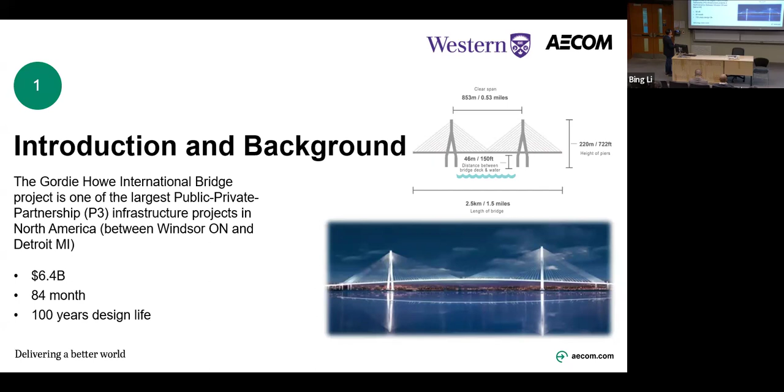Okay, so everybody probably knows where Windsor is. It's almost in the west and south of Ontario, or even of Canada. Detroit is just over the Detroit River. There are two existing routes to the United States: one is the Ambassador Bridge, which is about 100 years old, and the other is a tunnel, the Detroit tunnel, going downtown to downtown. But the government of Canada wished to have a connection through the 401 directly to another bridge, which is the Gordie Howe bridge.

So this one is the site of this project. Today we're going to cover mostly the Canadian POE entry, about all the building design. This project includes main bridges and the Canadian Port of Entry, the US POE, and then Michigan interchanges connecting with the I-75.

The Canadian Port of Entry includes 9 buildings, and then we have return bridges to Canada. So if there's something wrong on your way to the United States and you have to go back, there's a return bridge for that.

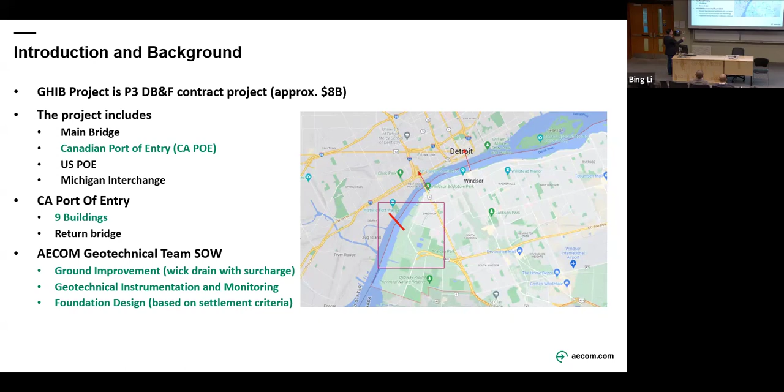So this is the Canadian Port of Entry, with the 9 buildings I mentioned, including the main building and the primary inspection booths. When you're coming into Canada you have to show your passport there. This is the area, and then the important one is the toll booth.

You have to pay the toll to use the bridges, and we also have a large scale imaging building which has some X-ray capability, so big trucks can go through to check what's inside. There's also a maintenance building.

There's also a salt barn - if there's a lot of snow, you use salt to clean the road. We also have a hazmat canopy, and then a maintenance and client processing building. So 9 buildings total are in the scope of the Canadian POE.

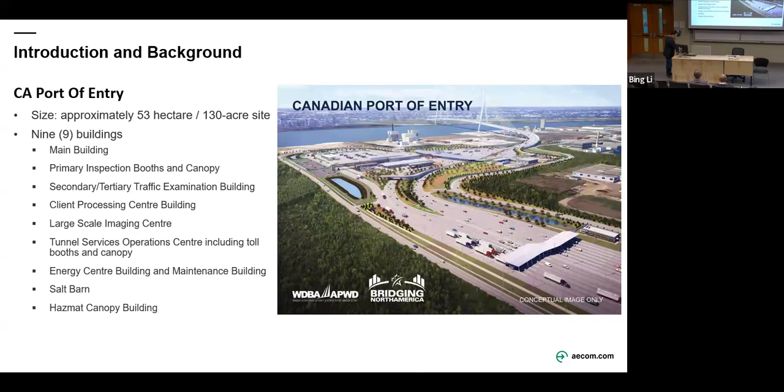Okay, so regional geology - if you're a geotechnical engineer focused more on soil mechanics, you may be familiar with the geologies. The site's regional geology lies on the physiographic region of southwestern Ontario and the eastern Detroit lowland physiographic region.

It's called the St. Clair clay plain, which means if you look at the site, the project site is located in the clay deposit.

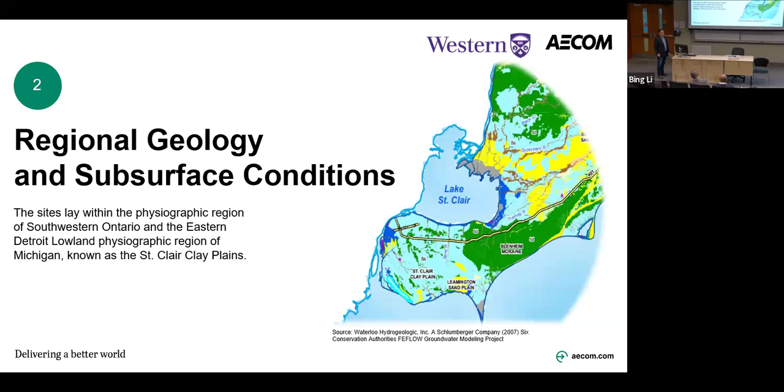A little bit more detail - the overburden is glacial lacustrine and glacial till and till-like soil in the Windsor and Detroit metropolitan area. Near the river there's a lot of soil deposit, and at the bottom of the deposit is till material, which combines every type of material together. Just beneath the till there's limestone bedrock.

So we have to look at the geologies, not only the overburden, but also the bedrock geologies, for the design of any foundation or design work.

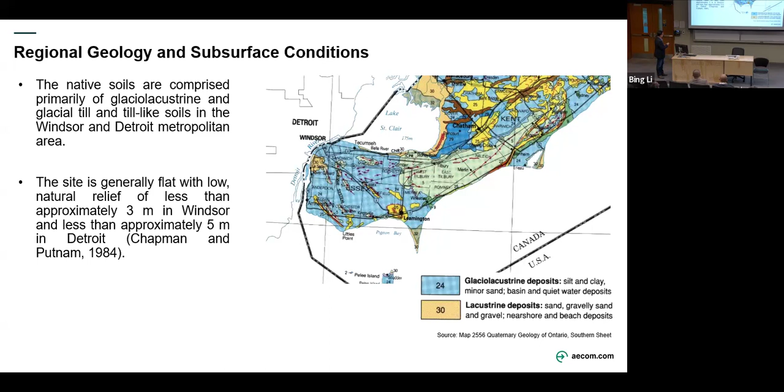So based on some investigation, we came up with the soil stratigraphy using all the data we analyzed. As you can see, we have about 2 meters of fill, which is just fill works - usually if you have a P3 project, the owner prepares the site, so that's why they put some fill on the ground. There's old fill and new fill.

Also below that, there's desiccated clay - the clay is a little bit dried and over-consolidated, so we call it desiccated clay, which has a little bit higher strength. Then there's an upper clay layer and lower clay layer, depending on index testing and shear strength and such things, we divide it into 2 layers.

And then on the bottom there's a silt layer - this is almost like a till-like material, which is more granular material at the bottom of the upper layer. Then we have bedrock, but the bedrock actually keeps going - we just did modeling for only a few meters of it.

One of the challenges on this site is artesian water. If you drill a hole close to the bedrock, the water actually comes up. The measured artesian head I found on the site is about 6 meters, so if you just drill the hole, you can find springs coming up to that height. This groundwater also contains a lot of hydrogen sulfide gas, so when it's exposed to the air it becomes a gas and you can smell the rotten eggs - a very strong rotten egg smell.

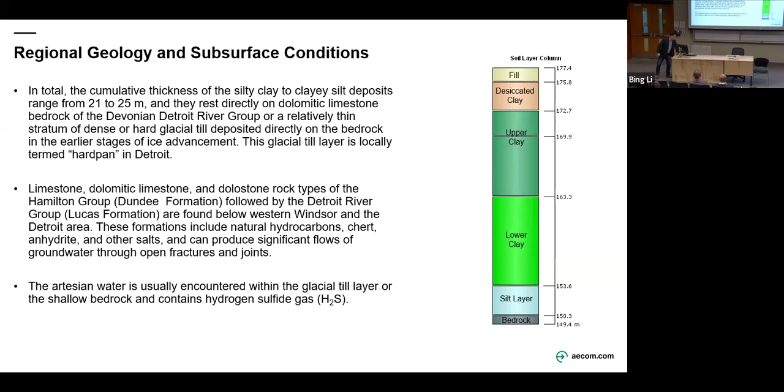So it's a challenge to design with a deep foundation. If you drill through the overburden close to this area, you have to deal with all the artesian pressure and also these toxic gases. That's why our design approach is to do consolidation, using consolidation theory for pre-loading and surcharge design, so we can come up with a shallow foundation for the buildings.

Now for the soil properties: this is a CPT result from one of the sites, the main building site. You can see there's a silty deposit up to 25 meters. Overburden thickness averages about 25 meters - some areas 20, some areas 30. The blow count in this soft clay area is weight of hammer, 2-3 blows per 0.3 meters - very soft clay. So we have to consider primary consolidation and also secondary consolidation when designing for the building.

In addition to the artesian pressure, we also have to deal with a high groundwater table. Actually there are two different groundwater levels. If you go to the site, different layers have different groundwater regimes - sometimes groundwater is in the lower part of the overburden, sometimes there's shallow water as well. Sometimes these are separated, sometimes connecting, so you have to understand the hydrogeology to deal with all this groundwater. We found there are two regimes: one close to the bedrock, which is a very strong artesian water regime, and also very high groundwater about 2 meters below ground surface.

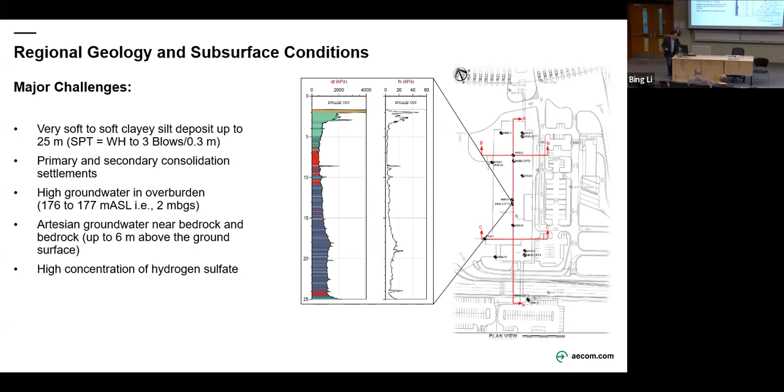As I mentioned, artesian groundwater near the bedrock is another challenge, along with those hydrogen sulfide gases. So we have to consider all these things, and we came up with a design using surcharge, pre-loading, and wick drains.

I think you're familiar with consolidation theory. If you build some surcharge, you can see consolidation accelerating, and then it becomes steady after finishing all primary consolidation. That's the benefit of surcharge and preloading - accelerating soil consolidation to meet design criteria. If not, and you just put a building over there, it will gradually settle over a long period of time, so you need to consider more about that settlement in your design, and it becomes a long-term issue.

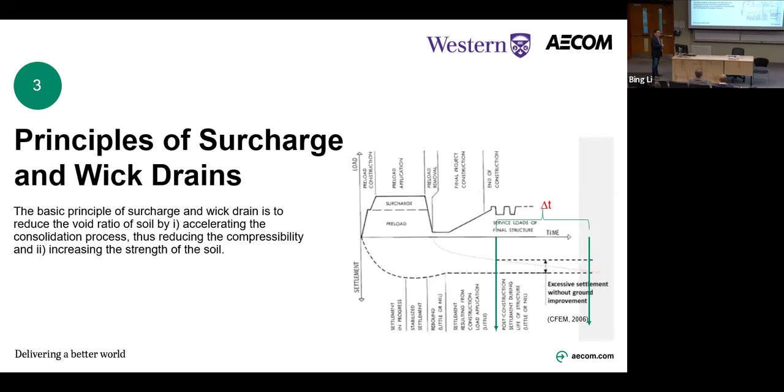Now for some theory, I'll go through this quickly. In surcharge theory, the stress changes from delta sigma z0, which is the existing pressure, plus the surcharge. When you put in the additional surcharge, the void ratio changes from E0 to E1 because the soil is compressed. After consolidation finishes, you can remove the surcharge, returning to the original normal loading condition, but E1 doesn't change back to E0 - so we still retain much of the beneficial consolidation. Another benefit is that the shear strength of the soil increases after the surcharge. Based on this, you have to think about all these things for your future design.

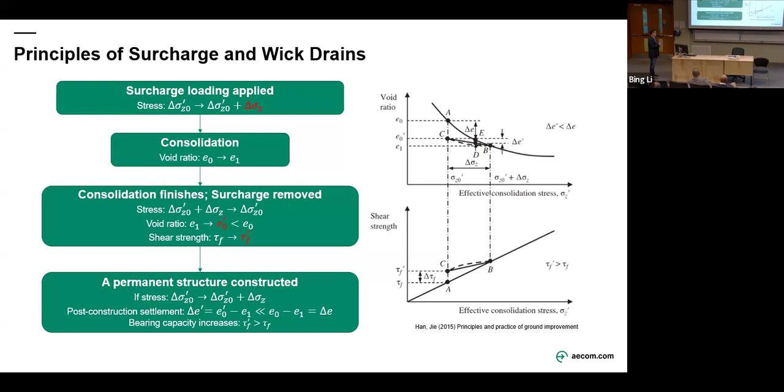Okay, this is the 1D consolidation theory. I'm just going to be touching on it very simply. So what's the benefit of increasing the drainage path?

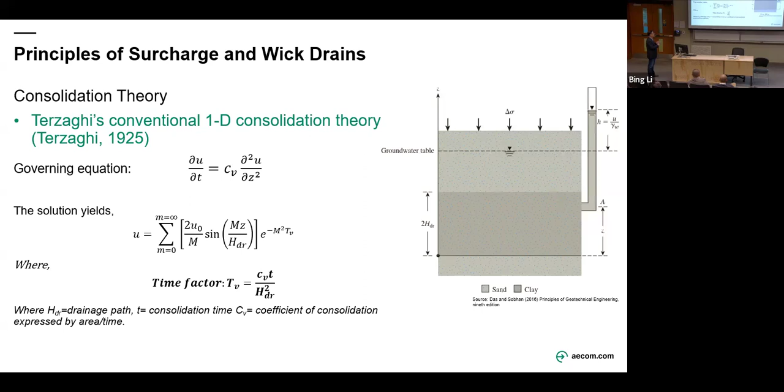Actually, drainage path is a function of Tv, which is a constant value. If you want to accelerate the consolidation time, you have to change your drainage path. That's why if you're using some wick drains into the soft clay, you can drain all the water quickly, and then the consolidation time is going to be reduced. This is the theory of using wick drains with surcharge together.

If there are no wick drains, the drainage path comes from the bottom, wherever the groundwater is, and it has to discharge the water on the surface. So it's pretty long - this is the drainage path without wick drains. But if you put in wick drains, there is a lateral movement between the drains, and the path is going to be much faster, accelerating the groundwater drainage through the PBD. PBD is a prefabricated vertical drain, or sand drain, such things.

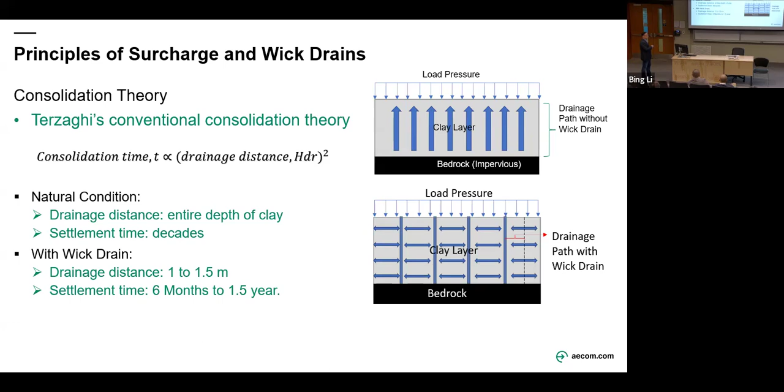You can design this distance based on how much time you need to put in the surcharge and preloading, in terms of the construction schedule.

A little bit more about the hydraulic conductivity in horizontal direction, and how you combine it with the vertical drain, and how that's going to work. It's a function of the horizontal consolidation coefficient - this is the theory. They use the vertical and radial consolidation theory together to come up with the consolidation acceleration.

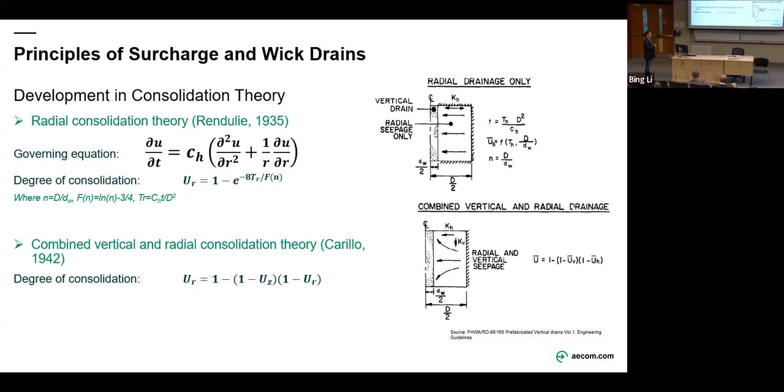Another theory is about secondary consolidation. After finishing primary consolidation, secondary consolidation starts, which is creep consolidation under self weight. Some parameters we can get from laboratory creep consolidation testing over a long period of time, but this number is going to be just for normal conditions.

If you're using preloading and surcharge, we have to think about how C alpha is going to change. One theory was proposed by Dr. Mesri, who is at Illinois Champaign. You can see that if you use surcharge and preloading on the ground, C alpha, the secondary consolidation coefficient, actually reduces. This is the theory.

If you want to know more detail, you can find the paper from here.

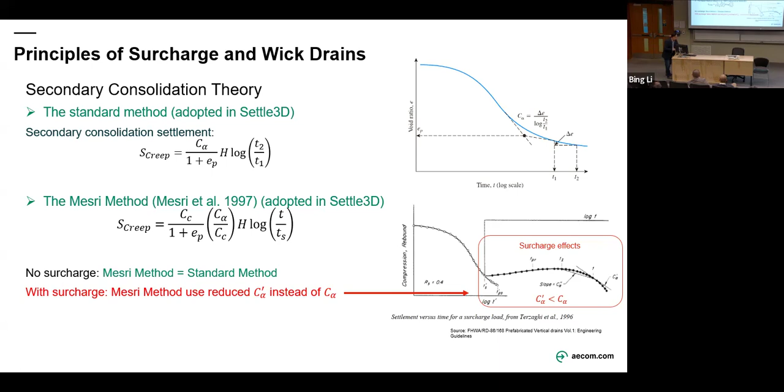Based on that, we are using a Mesri method to determine C alpha prime. You have to use the vertical stress and the final stress, and then use this chart to get an idea of the ratio between C alpha prime over C alpha. This is one of his research findings, and it depends on the surcharge loading. If you have a higher surcharge, C alpha is reduced much more than with less surcharge loading.

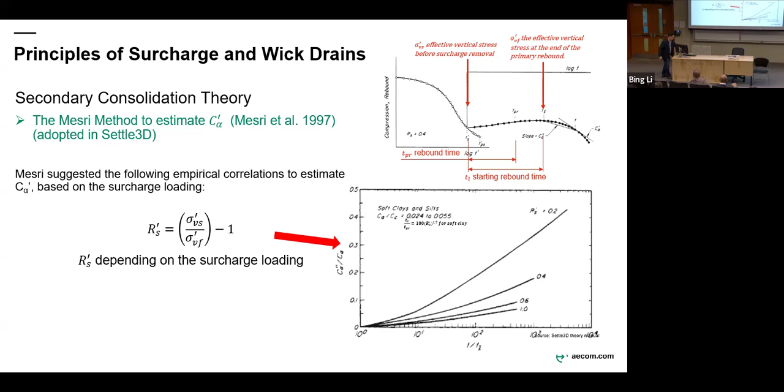We also use another method, because if you do the design and just rely on one method, you're not sure that your calculation or assumption is correct. So I always encourage using another method to verify that our calculation for the primary study is correct.

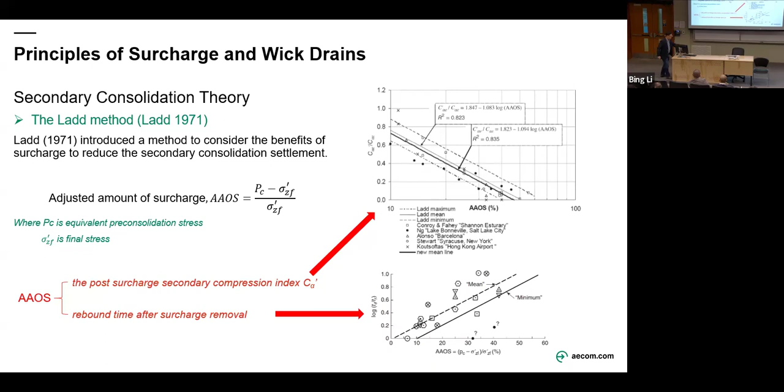The other topic is strength gaining. We've been using two methods here as well - one using the plasticity index (PI), which is easy to get, and the other using CPT or other consolidation testing to get OCR. Based on these two, we compare how much strength is gained after preloading and surcharge, and decide to use the Skempton method.

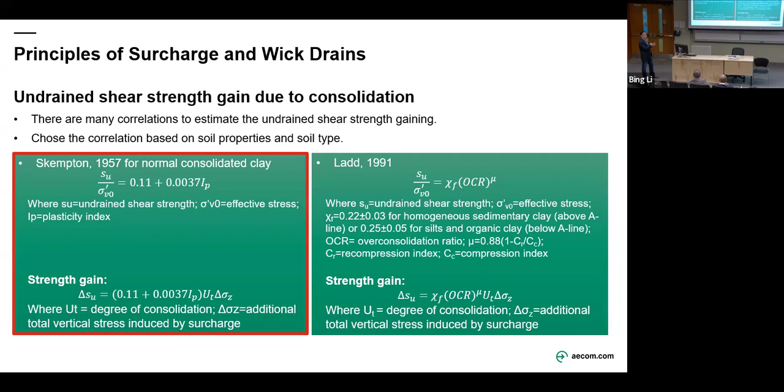Skempton's method is a bit older, but we compared it with pilot testing. Because it was such a large project, they actually built a small berm or surcharge and got data on how the soil actually behaves. With this data, we can calibrate based on actual measurements, and we decided that the Skempton method is more reliable when compared with field data. So we used two methods, but found the Skempton method suitable for Windsor clay.

Okay, this is a wick drain. When you see that there is a core, that's the wick. Then there is some smear zone, and also some surrounding subsoil. The smear zone changes the hydraulic conductivity - if it's disturbed, the hydraulic conductivity tends to reduce, so the disturbed zone has much smaller hydraulic conductivity. Then there's some relation between radial hydraulic conductivity and the smear zone. The radial one, just outside the core in the undisturbed zone, has much higher hydraulic conductivity. So you have to consider those parameters for your design.

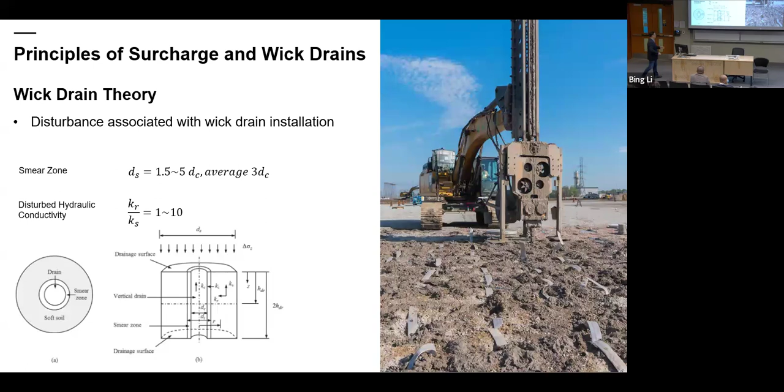So in the beginning, I mentioned the design life is 100 years. That's quite a long time, because if I design at this moment, after 100 years I'm going to be dead, and nobody knows if all the buildings are still going to be standing or if they're going to be sinking down. We don't know, right? But the design life these days is almost always 100 years.

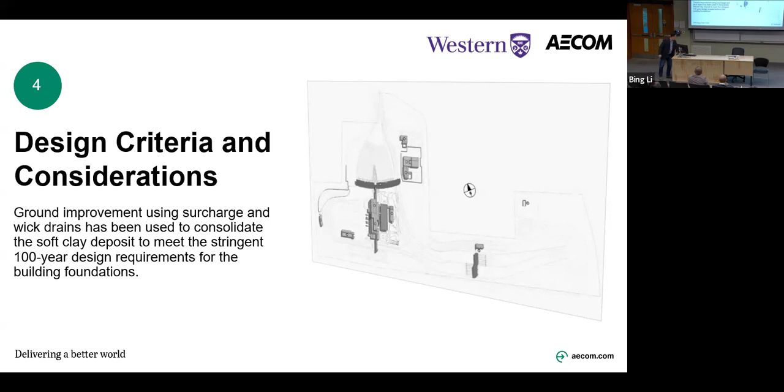And then this is the PA. I told you that all the project is based on the project agreement. So when you're starting your work as a consulting engineer, someone already has some experience, so you have to follow the PA - this is conformance, and this is one of the PA requirements. We realized they want to say, okay, you have to follow the NBCC, National Building Code, and follow all the different settlement criteria in the NBCC.

We can actually ask for some relief, because due to the nature of the soil, meeting 25 millimeters of settlement over 100 years is impossible to design for. So we asked the project owner, we cannot do 25 millimeters, we have to increase our total settlement criteria to 50 millimeters. But we want to keep the differential settlement at the same criteria, since most building damage is due to differential settlement, not total uniform settlement - that doesn't damage the structure as much. We emphasized this, and they accepted the 50 millimeter criteria.

So that's why we design with the 50 millimeters. Otherwise, our surcharge period with the big amount of soil would need to sit for maybe 2-3 years, and then we cannot meet our design and construction schedule, right?

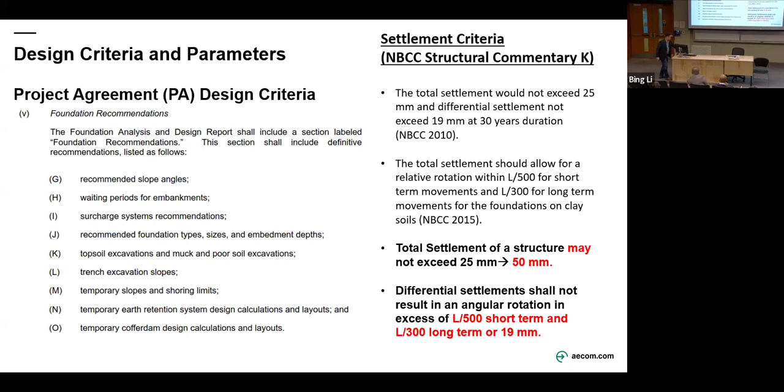So this is the main building, and we've done some boreholes. Along all the buildings you can see there is some fill, then upper clay, then lower clay, and then some bedrock at the bottom. So it's pretty uniform stratigraphy - most of it is similar clay soil deposits, not much of a hiccup or unusual behavior or unusual spots in the soil.

But you're always thinking about that - you have to have enough number of bores to make sure that your design assumption, or your design soil profile, is confident or not. If you don't have enough soil data, you cannot be confident in your design, right?

So you can see how many bores we drilled - 141 bores, 49 CPT, and we installed 58 vibrating wire piezometers, and also 38 monitoring wells installed in the entire POE area. For just this main building area: 13 bores, 5 CPT, 8 VWP, and 4 monitoring wells used for the design of only one building. We also used some of the surrounding area for the statistical analysis to get all those soil parameters, plus advanced lab testing - 1D consolidation testing, 3 triaxial, and 10 unconfined compression soil tests.

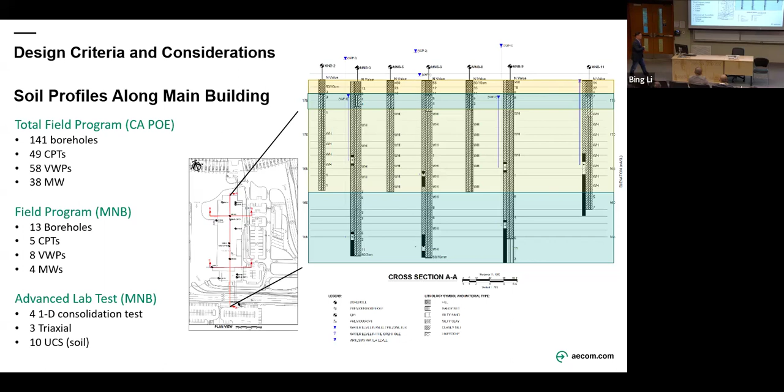Okay, with wick drain design, you can choose what pattern of the wick drain installation. One of them is a square shape, or another one is triangle shape. So we selected this triangle, and then we calibrated our design.

This is some software we call Settle3D. If anybody knows about Settle3D, it's a design program for simulating all the consolidation and settlement calculations. There's some input if you're using PVD, and you have to put some numbers. We put 3 and 3 as our initial value for the design.

We can design the pattern and distance of the wick drain based on our plan for the preloading and design life. So all things have to be assumed in the beginning, and then at the end you probably have to do back analysis. That's the industrial practice.

You just finish the design at DD phase, and if you're not doing the back analysis, then we have nothing to learn. This is the important part. So this is all the parameters we're using for our numerical analysis using Settle3D.

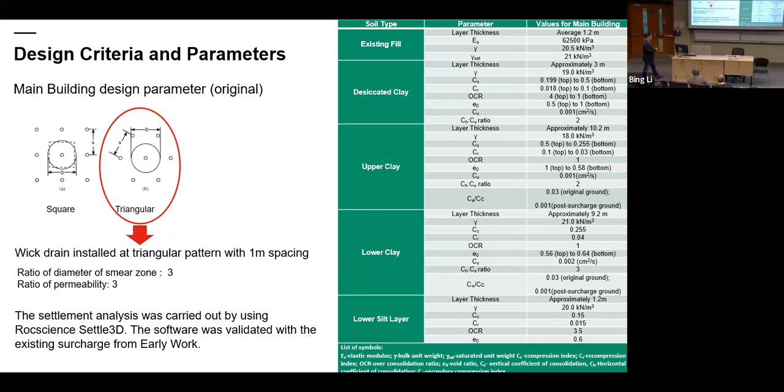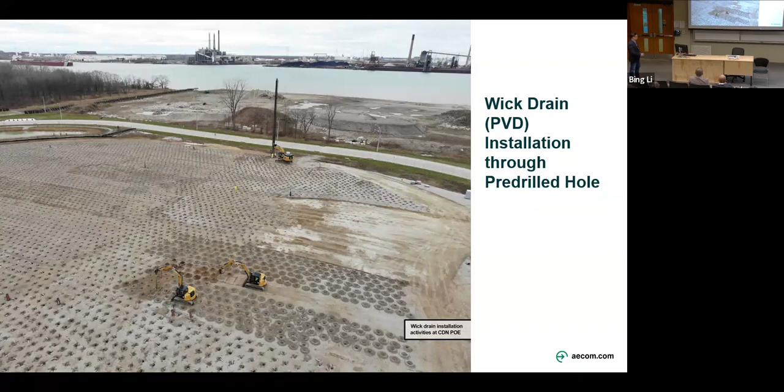So C alpha value based on the test result, and our theory based on the Mesri and also Ladd, we can come up with a similar number, 0.002 to 0.005. So we can select it as one of the numbers for the secondary consolidation for our settlement analysis.

Even after the removal of the surcharge and preloading, we usually have some rebound, because the soil has elasticity. After compression, if you relieve the stress, it's going to recover. That's the rebounding time, which we calculated at about 30 to 45 days. You have to work on it, because during the rebound time, if you're adding another load, we cannot predict the final settlement correctly.

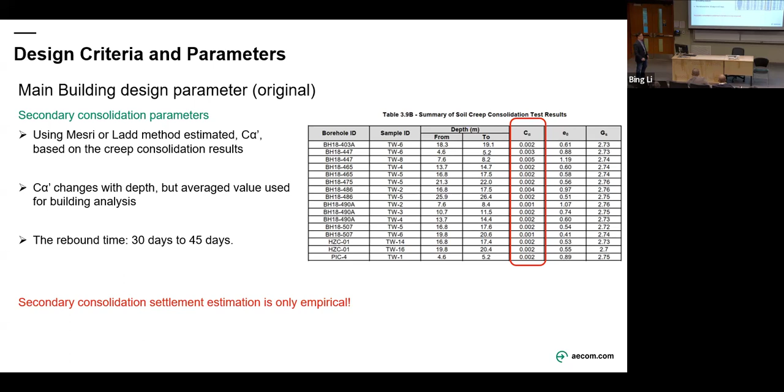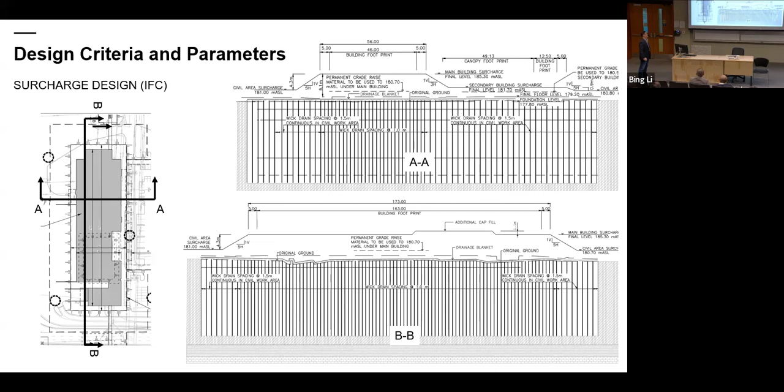So this is the final design of the surcharge. You can see it's about 56 meters wide on the cross-section, and the length is about 173 meters. It's a huge one, and the total height is about 8 meters. This is really huge, the surcharge for the one building.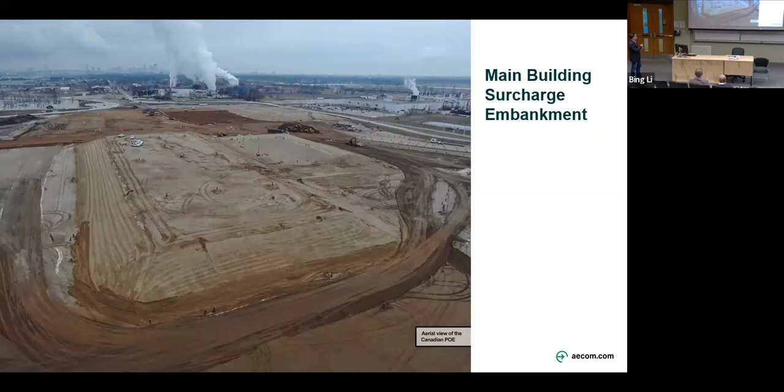So this is the monitoring point. We've been using the VWP, which is checking the pore pressure. In consolidation theory, if you put the surcharge and preloading, the pore pressure increases, and when this pore pressure dissipates as the water discharges, the soil is consolidating, right? So you have to check whether this pore water pressure is going to stabilize or not.

Based on using the VWP, vibrating wire piezometer, and then settlement plates, we have to check how much the ground has actually settled. And also on the side, because of slope stability, if there is loading and if there's any failure, the soil is moving here and there. That's why we have to use inclinometers to check the soil stability. So those are associated with the main building only.

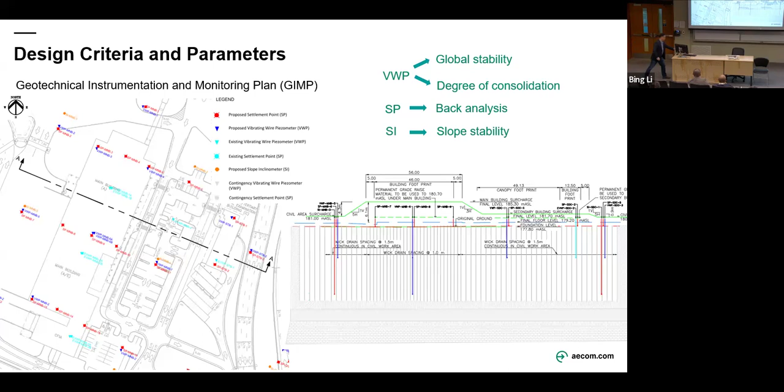After waiting for 1 year and I think 1 year and 3 months, we've been waiting for that time, and then we say, oh, I think now it's stabilizing, all the pore water pressure. So it's time we can remove those surcharges.

So this is the indicator of all the VWP. You can see this is the DB level, our level based on our surcharge, and this is going to be the measurement over time.

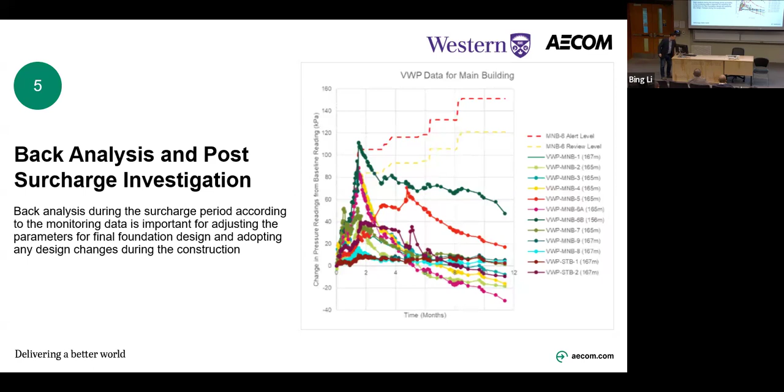So in the beginning, based on all the investigation and laboratory test results, and then our assumptions, we predicted about 1.4 meters of settlement within the 9 months.

So this is our original design, the detailed design basis. We compared it with our actual field measurement and found that it actually came up with only 1.2 meters. So where did the 200 millimeters go? That's why we had to study the back analysis based on some post-construction investigation, and also revisit our parameters so we could come up with some ideas.

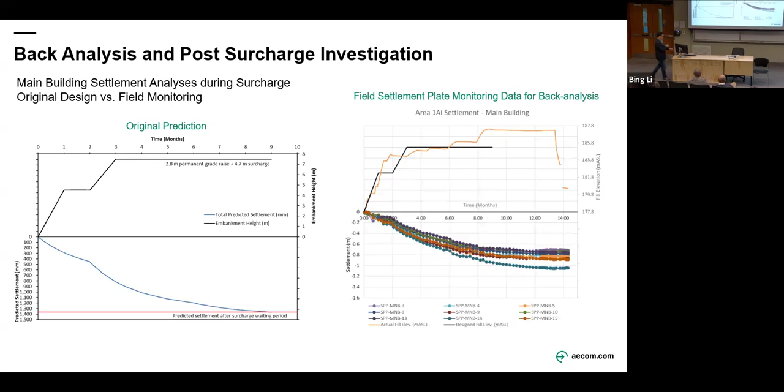One of the issues was that we were only using 3 layers of clay: desiccated, upper, and lower. But if you make more discrete layers, everybody knows that your prediction becomes more accurate.

That's why we looked at our data again and divided one layer into two: a slightly over-consolidated clay, a normally consolidated clay, and then another normally consolidated clay. So we divided it into 2 layers.

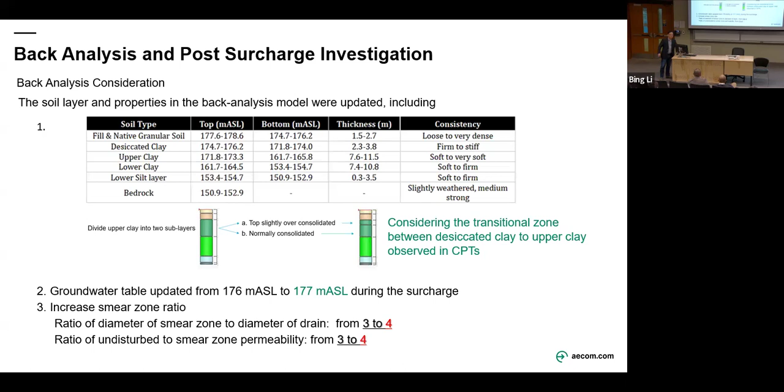Also, we changed our ratio of diameter of the smear zone from 3 to 4, increasing the smear zone. Some of this idea came from the CPT result after the preloading.

So you saw the previous original parameters and then the new design parameters. We did the back calculation, and you can see the OCR changes in the desiccated clay, which used to be 1 — we had to add another layer and change the OCR rate. We also changed the CHCV, the coefficient of ratio between horizontal and vertical coefficient of consolidation, from 2 to 1, and the lower layer changed from 3 to 2. So we were just trying to match our prediction with the actual field data.

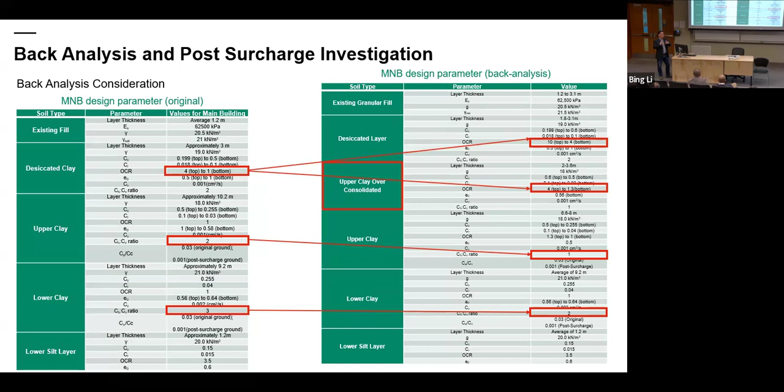This is after the back analysis. The dotted line is the measurement, and the continuous dashed line shows our final finite element modeling result. You can see a pretty good matching. Even in this area, using the exact location where we were measuring, the behavior shows pretty good agreement.

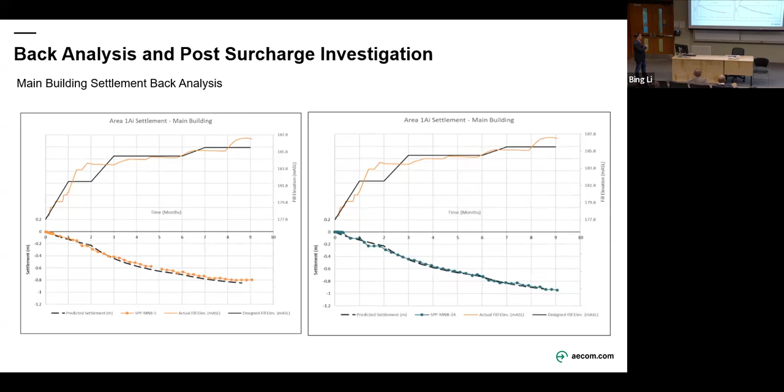When we extruded the soil sample through the Shelby tube, we found a silt layer. Because we didn't catch this during the investigation, we assumed this area was all clay. But there's a thin layer, maybe about 1 meter thick, of silt within the clay. That's why there was no strength gain — we did this testing in this area, and that's why we don't see much increase in strength gain.

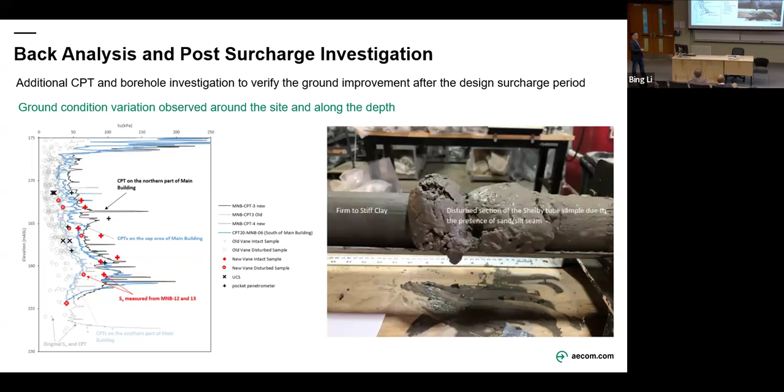That's why we had to make some kind of remediation method, using additional surcharge to meet our design criteria in some locations. So you can look at the figure, and there's an additional surcharge we had to add during the period of the surcharge.

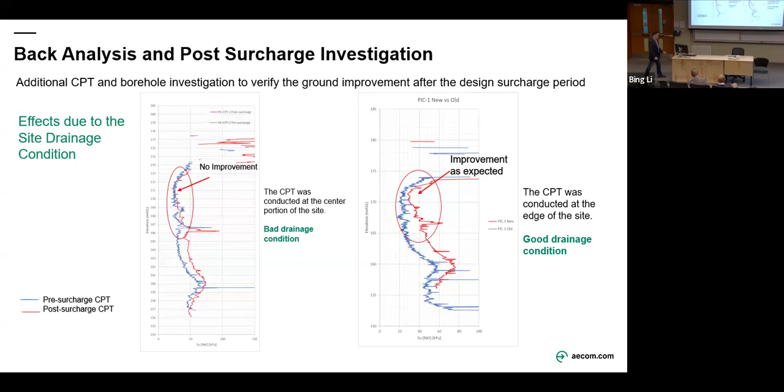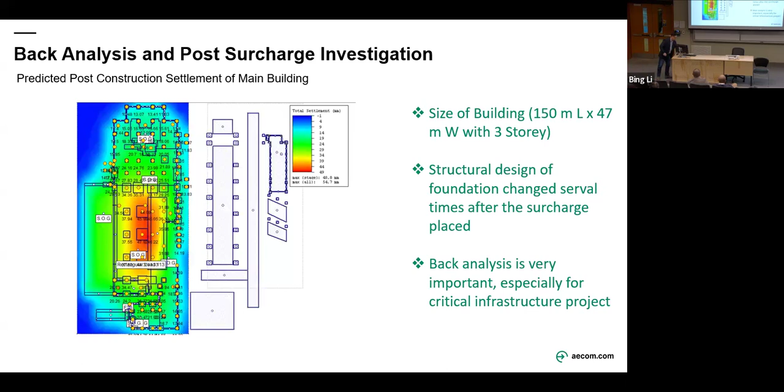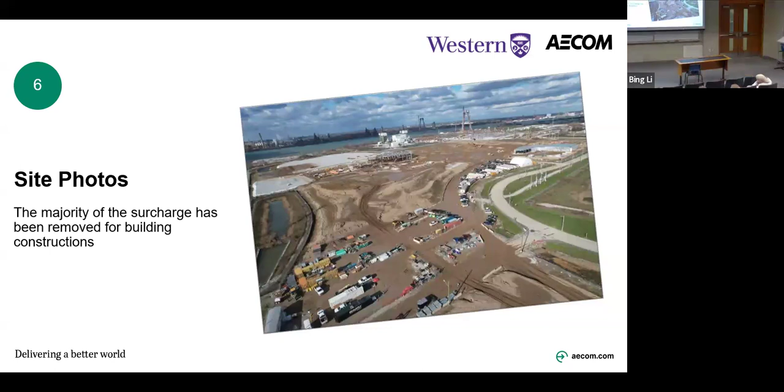Okay, so this is the drainage blanket that they just put in the main building area. And then after that, they put in all the PVDs, the wick drains.

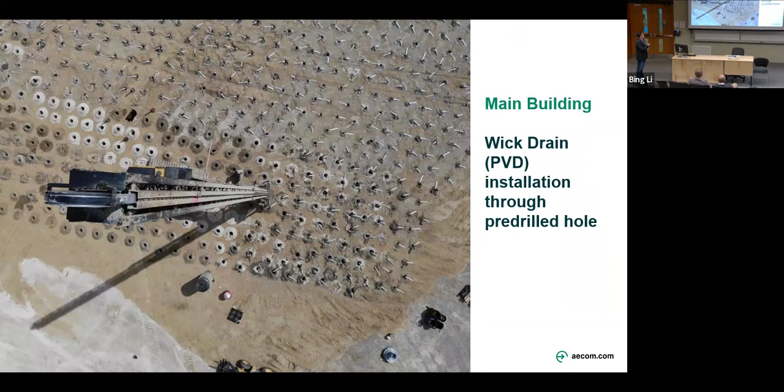And this is the first stage of construction of the surcharge. Because of the pore pressure, it increases. If pore pressure increases, then shear strength of soil decreases - it's soil mechanics, right? So we have to wait a certain period of time to dissipate that pore pressure to stabilize the strength of the ground.

So the first stage is about 4 meters, and then waiting about 3-4 months, and then we look at the pore pressure changes, and okay, this is good, and then you can put another layer.

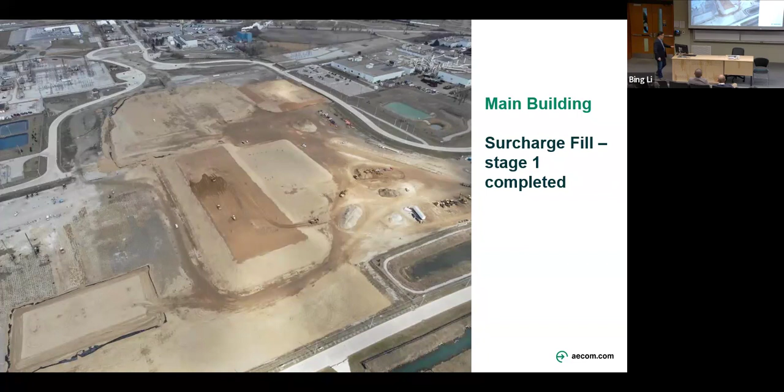And then this is the final one, and you can see there's another patch. This is the area where we don't have the soil strength gain, so that's why we're adding another 1 meter on the patch.

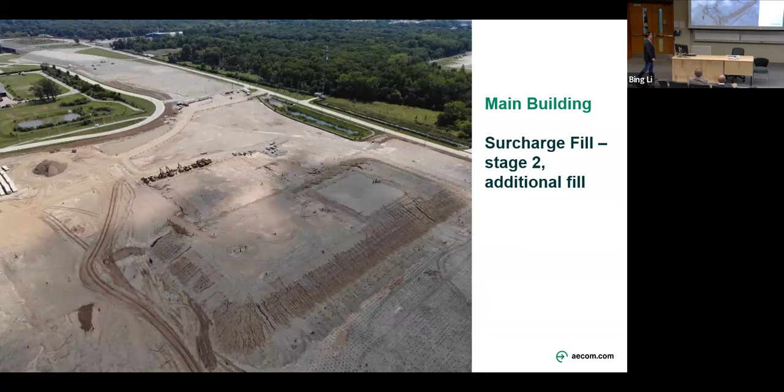So there's some remediation work because the side slope was affected by rainfall, and then some of that we just made.

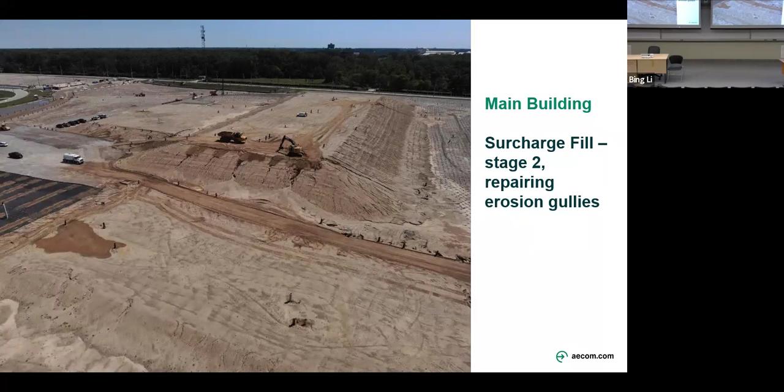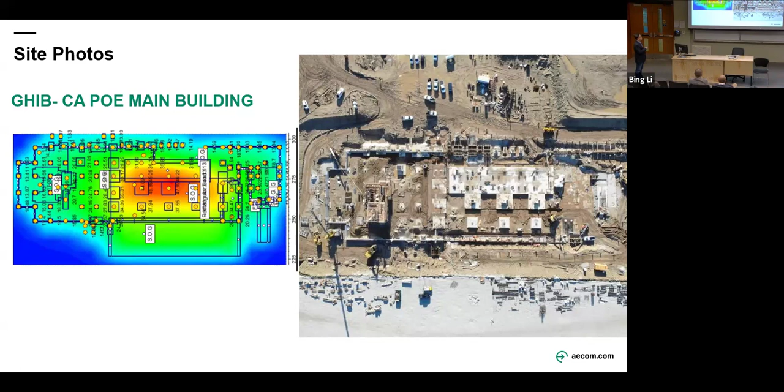Okay, so this is the recent photo, you can see our main building is here, connecting with the primary inspection booths, and the return bridge is here, and maintenance buildings, LSI - large scale imaging building, and it has canopies, and the service is somewhere here. So this is the recent photo, and the stormwater ponds are all designed and well constructed.

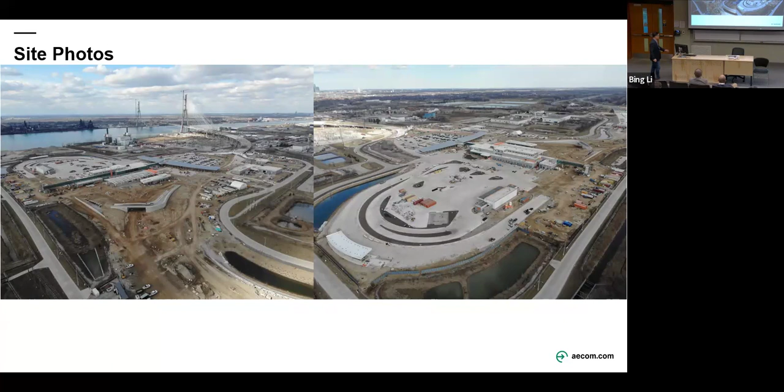Okay, another photo is about this port of entry. In the future, if you go to the United States, you can come back in this way. And you can see the approach bridges to the bridges.

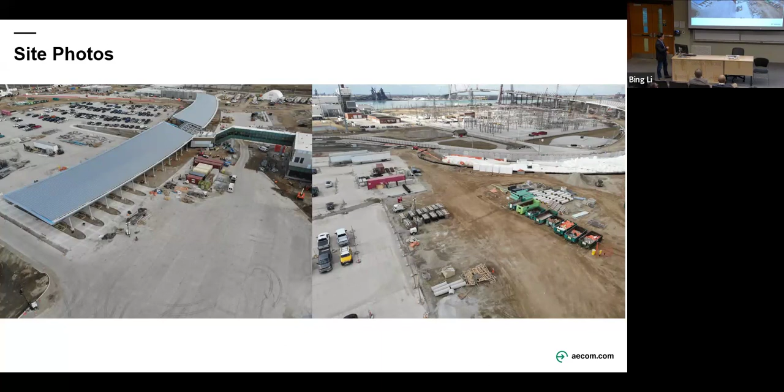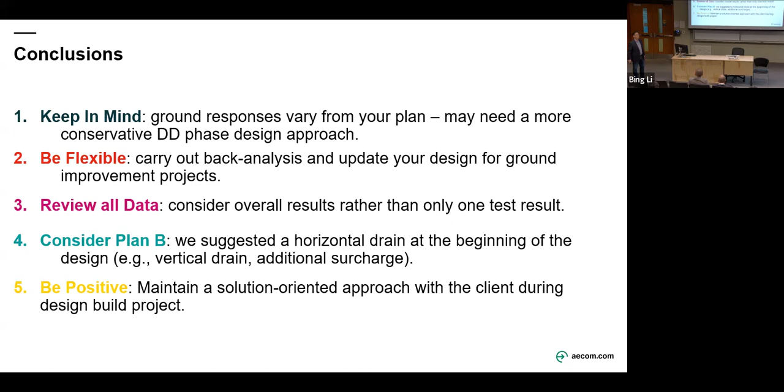Okay, so any questions? Questions from the audience? Probably only a quick one, because, yes, Leonardo.

I do have one question about the back analysis on part 5. When you noticed that the field measurements were not matching the design, out of all parameters, how did you know it was the OCR and dividing that clay layer into two that was the main concern? Okay, so that one is actually, we just went through the CPT result, and we found out there was some difference in the result, so that's why we decided to put it into much more layers.

But I think the Dr. can answer more accurately. I can explain a little bit more on that, because when you do your initial design, when you review all your data, you already start making assumptions, right? Like you start thinking, okay, how are we going to model it, how are we going to design it.